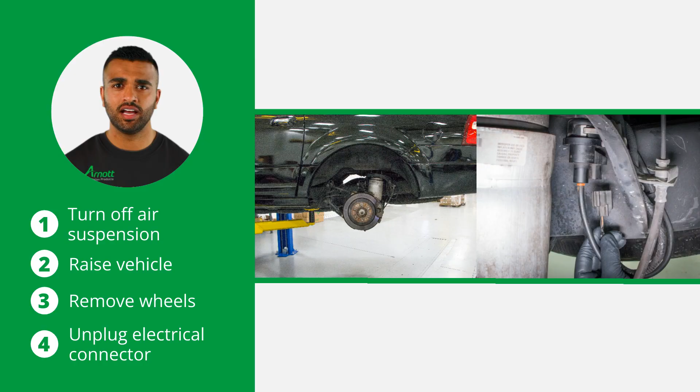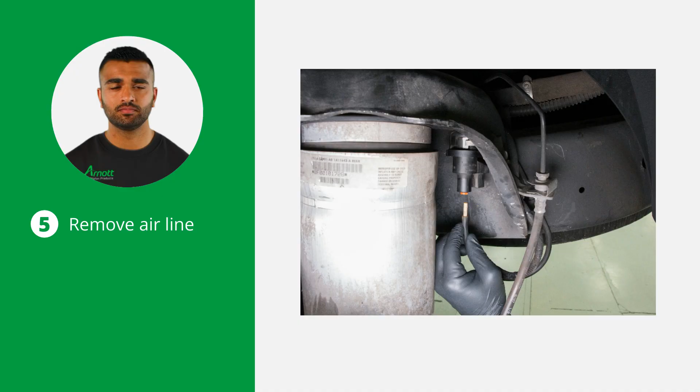Unplug the electrical connector from the air spring solenoid. Now, remove the airline from the air spring solenoid. Push the collar in to release and pull the airline out. Also, remove the retaining clip. Rotate the solenoid a quarter turn and pull down to release.

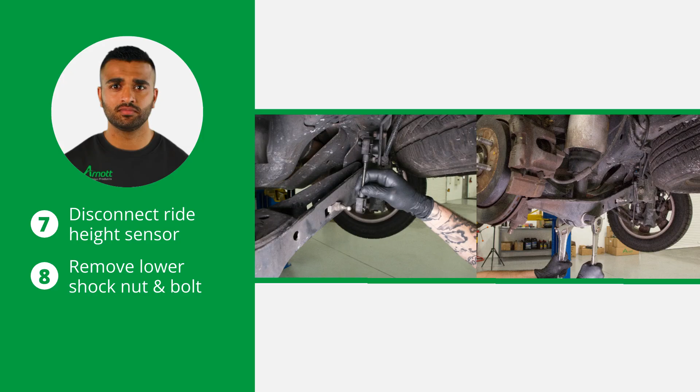Now, disconnect the ride height sensor and remove the lower shock mounting nut and bolt. Then remove the inner lower control arm nut and bolt. Loosen and remove the top 3 mounting nuts and remove the air strut from the vehicle to complete the removal.

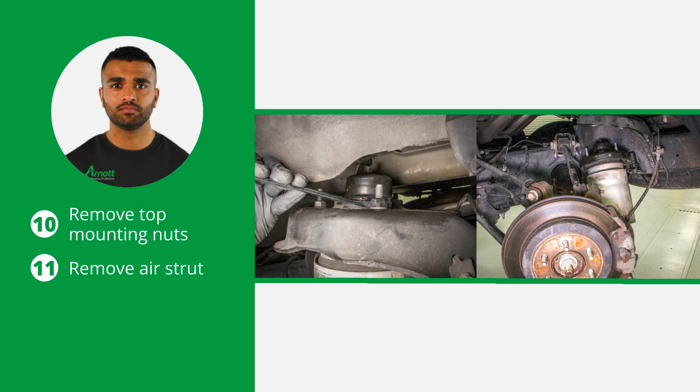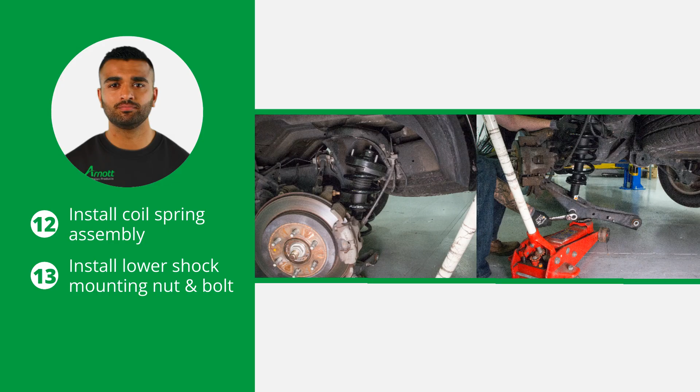Tighten all nuts and bolts to the manufacturer's specifications during the rear coil installation. Install the coil spring assembly onto the vehicle and install the lower shock mounting nut and bolt. Now, install and tighten the mounting nuts and align the control arm.

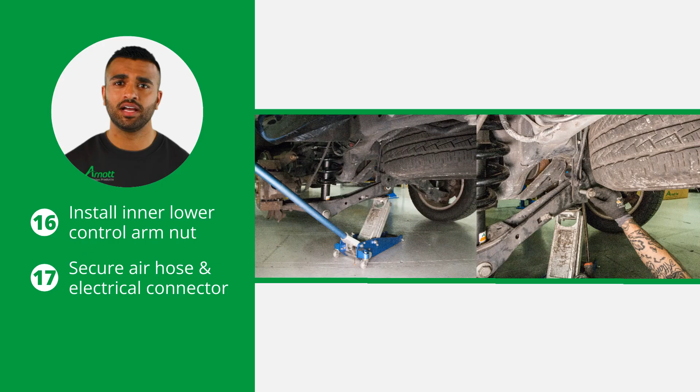Using a floor jack, install the inner lower control arm nut and bolt. Secure the air hose and electrical connector in a suitable location. Then reconnect the ride height sensor. The remainder of the installation is in the reverse order of removal.

For the electronic bypass module installation, first locate the air suspension module under the left side of the dash, between the emergency brake and the standard brake pedals. Now, unplug the 2 multi-pin connectors from the air suspension module and leave them disconnected.

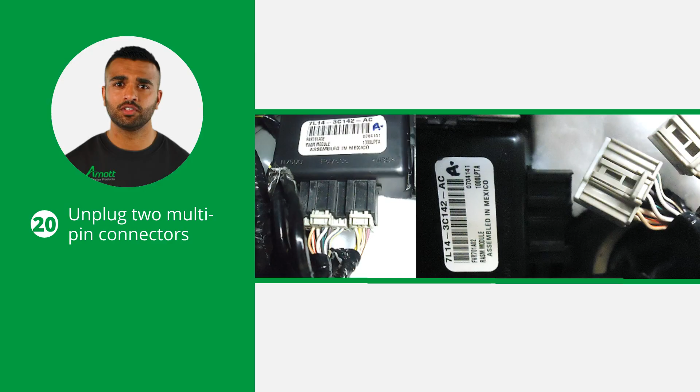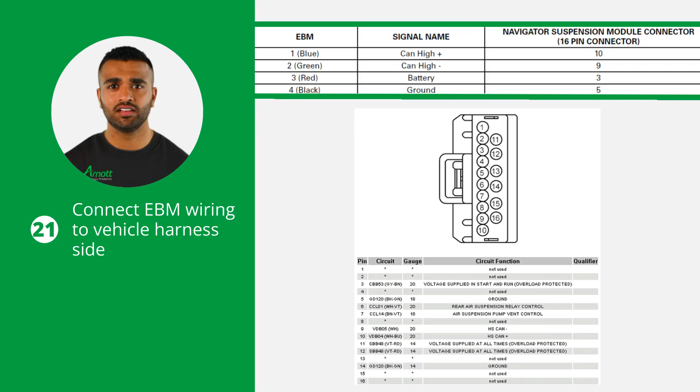Pause the video to read the charts to properly connect the EBM wiring to the vehicle harness side of the 16-pin suspension module connector. All connections to the EBM will be made to the wire harness side of the larger 16-pin connector. Leave 2 multi-pin connectors disconnected while the EBM is installed.

Thank you for following our guide on installing the Arnott rear coil spring conversion kit with EBM for the Lincoln Navigator, U326, and the Ford Expedition, U324. Proper installation ensures the longevity and performance of your vehicle's suspension system.